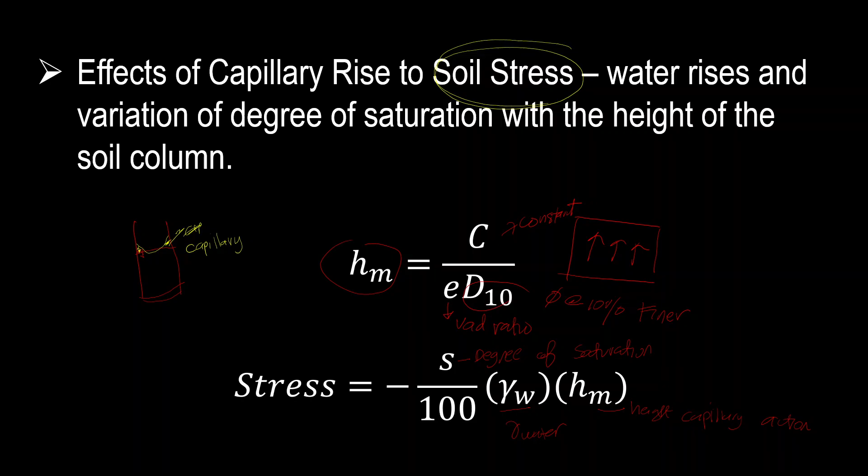This problem came from a CE board exam, November 1998. A clay layer 4 meters thick rests beneath a soil deposit of submerged sand 8 meters thick. The top of the sand is located 3 meters below the surface of the lake. The saturated unit weight of the sand is 25 kilonewtons per cubic meter, and the clay is 20 kilonewtons per cubic meter. Determine the total vertical pressure, pore water pressure, and effective stress at the mid-height of the clay.

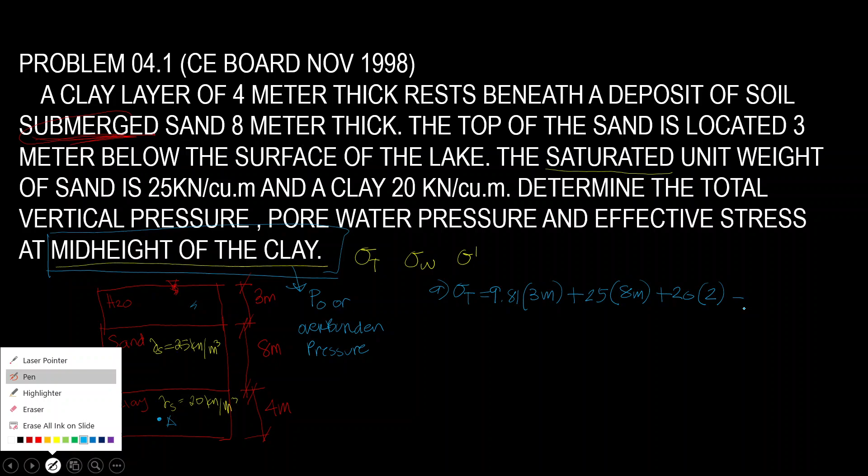Kapag kinompute natin yan, makakakuha tayo ng sagot na 269.43 kilopascal. Ito yung sagot natin for question letter A.

Question letter B, what will be the pore water pressure? Ano daw yung pressure na na-induce ng tubig? So to solve that, pore water pressure or neutral stress is 9.81 for the unit weight of water, times mid-height of the clay hanggang dito. Tama, ito yung may tubig - so 3 plus 8 is 11, plus 2, this will also be 13 meters. So 9.81 times 13, makakakuha tayo ng 127.53 kilopascal - ito daw yung stress na na-induce ng water pressure.

Last, what will be the effective stress? Effective stress is the difference between the total minus pore water pressure. So 269.43 minus 127.53, makakakuha tayo ng sagot na 141.90 kilopascal. So ganun lang mag-solve ng vertical stresses sa soil sample.

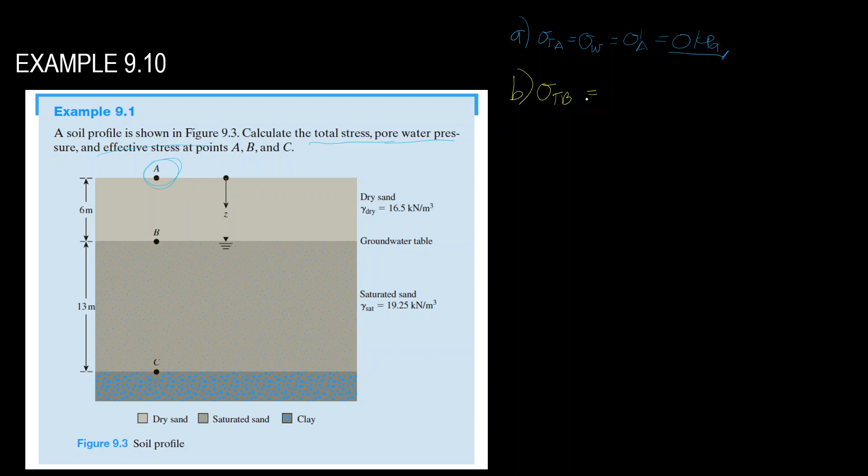What will be the total stress at B? So, kapag sinabi natin total, wala pa tayong minus. So we have 16.5 times 6 meters. Makakompute natin yan, 16.5 multiplied by 6, makakakuha tayo ng 99 kilonewton per meter squared or 99 kilopascal.

Pore water pressure or the neutral stress, since wala pa tayong tubig dito, that is 0 kilopascal. And the effective stress is the difference between total and water pressure, we have 99 minus 0, we have 99 kilopascal. That is for point B, nandito pa.

Kasi dito pa lang yung groundwater table. So since wala siyang binigay na properties at saka wala siyang in-indicate na capillary action, there's no need to compute the capillary ng sample natin. So okay pa tayo dito.

Last, letter C. What will be the total stress at point C dito?

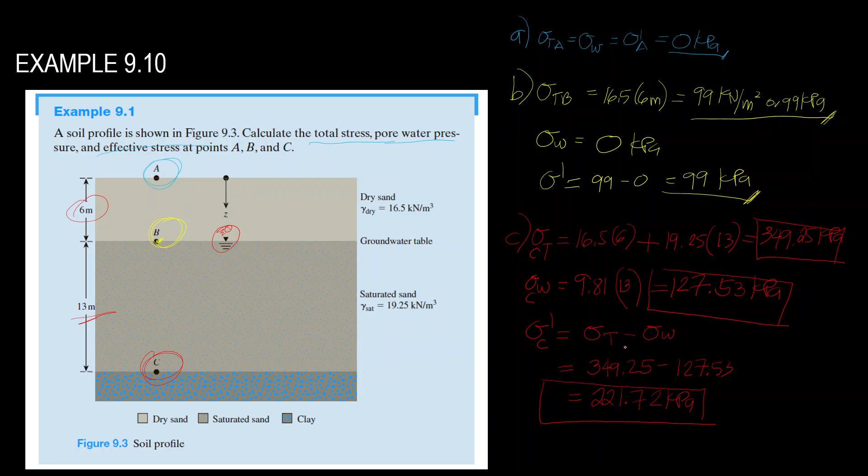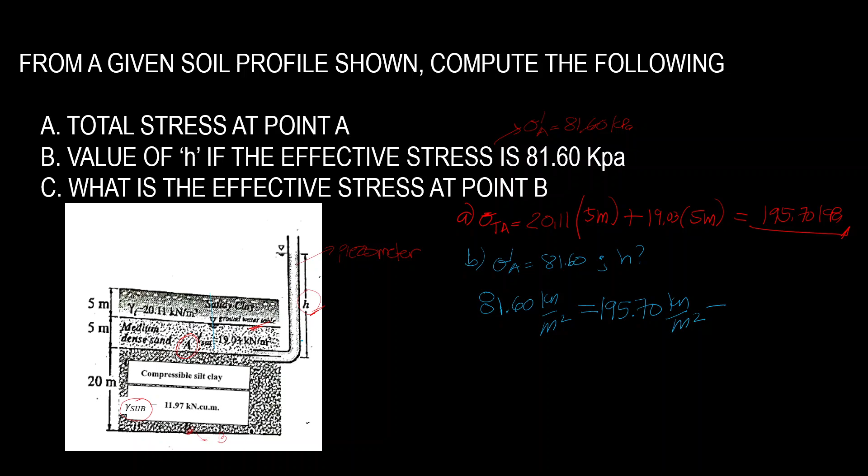Minus, bawasan natin yan kasi nagbaba tayo, since umakyat ulit tayo, therefore negative yung gagamitin natin. Sa 9.81, bakit 9.81? Dahil ito ay tubig o H2O. 9.81 multiplied by height. So one equation, one unknown, makakompute na natin yung value ni H. Kapag kinompute natin yan, makakakuha tayo ng height ng piezometer na 11.63 meters.

That is the height ng ating piezometer, 11.63 meters. Last, letter C.

What is the effective stress at point B?

So, this is point B, located 30 meters below the surface. We have the total effective stress indicated, 81.60, and we'll add to it the difference between the unit weight of water and the unit weight of saturated soil.

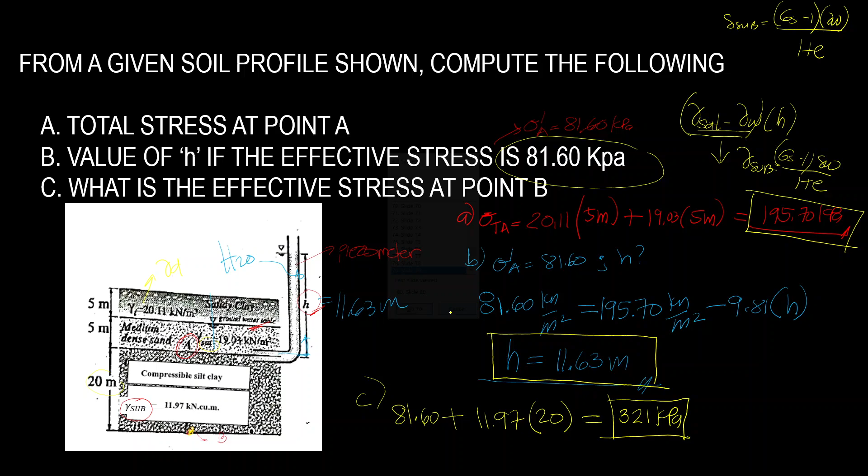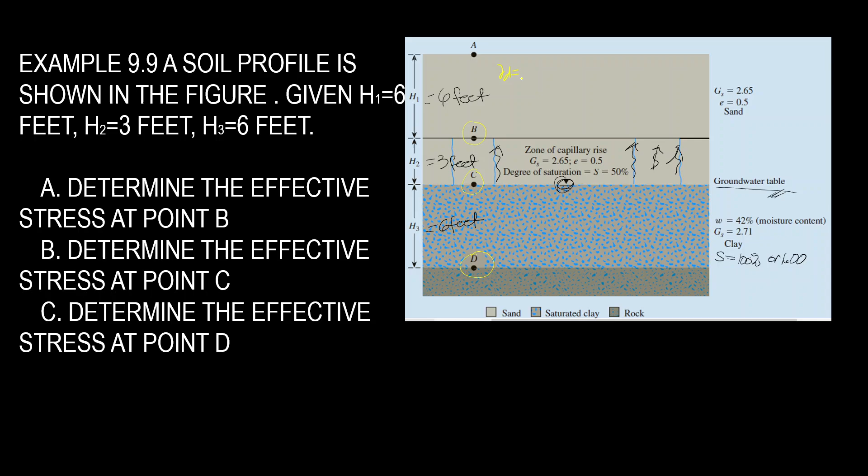Now, for our sand layer, only the specific gravity is given, so we need to compute its unit weight. To do that: dry unit weight equals GS times unit weight of water, over 1 plus E.

So: 2.65 multiplied by, since we're working in English units, 62.4 pounds per cubic foot, over 1 plus 0.5 void ratio. When we compute the dry unit weight, we get 110.24 pounds per cubic foot. That is the dry unit weight.

Okay, next, the capillary zone. As we said earlier, any type of soil aside from submerged is treated as dry. However, when we have capillary action or a capillary zone, it's as if the water has evaporated upward, so we treat the capillary zone as a moist section, or moist unit weight.

So we have the moist unit weight formula: GS times unit weight of water, times 1 plus W, over 1 plus E.

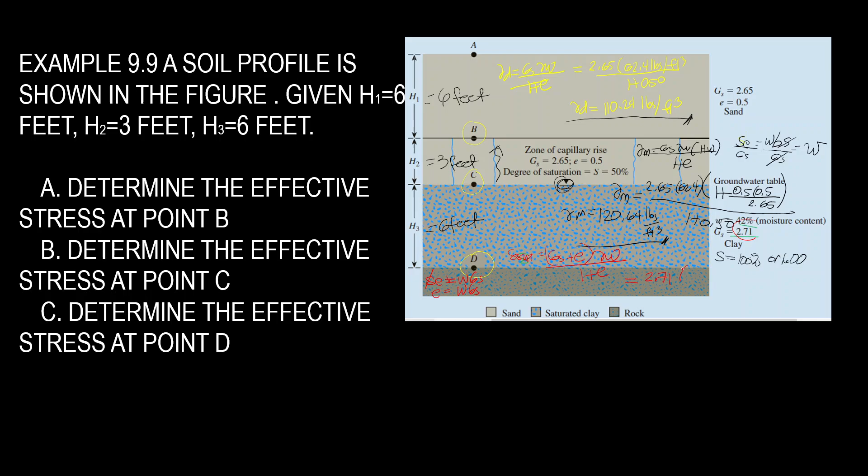So, GS natin na 2.71 plus i-sub natin 0.42 times GS na 2.71, overall 62.4 over 1 plus 0.42 times 2.71.

So makakakuha tayo ng saturated unit weight na 112.303 pounds per cubic foot.

So to summarize, unit weight of dried sand is 110.24 pounds per cubic foot. Moist naman, dito sa may capillary zone, meron tayong 120.64 pounds per cubic feet. And saturated, 112.303 pounds per cubic foot. So yun yung mga na-compute natin na mga unit weights.

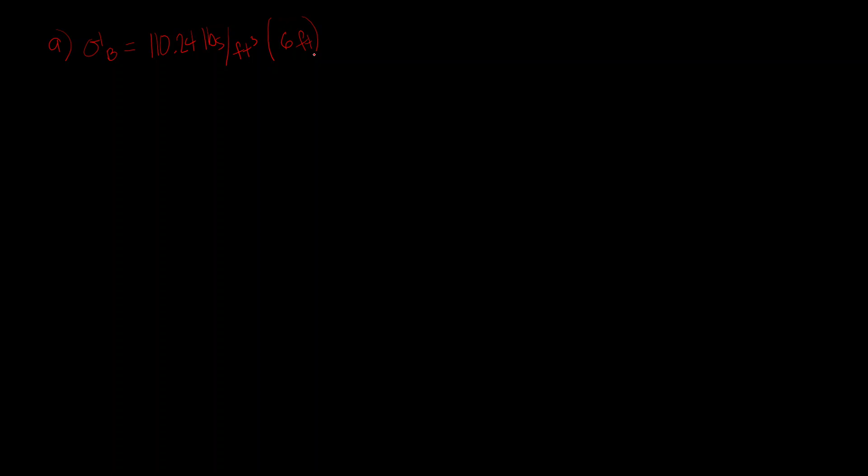So, 6 feet, unit weight of sand natin is 110.24 pounds per cubic feet, multiply by yung kanyang depth na 6 feet, minus yung effect ng capillary rise. So dahil capillary rise upward dyan, negative and negative naman palagi.

Degree of saturation is 50%, so kailangan in terms of decimal. So we have 50 divided by 100, tapos 62.4 pounds per cubic foot multiply by yung kanyang depth na 3 feet. Kapag ko-compute natin yan,

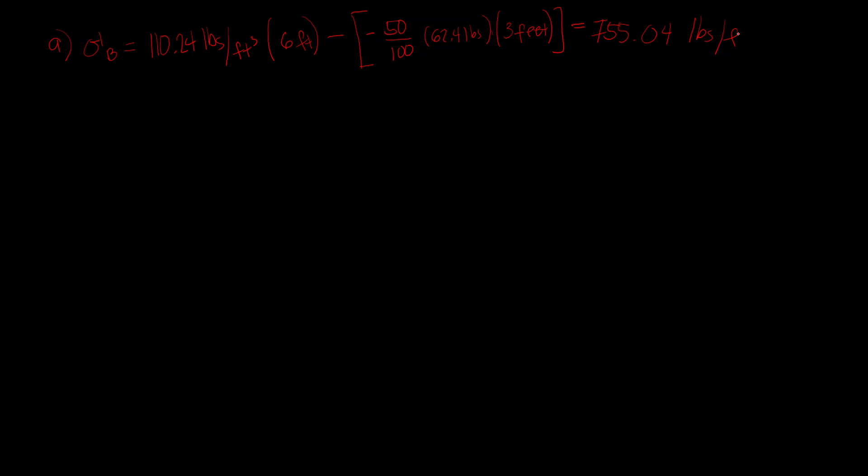110.24 times 6 minus negative 0.5 times 62.4 times 3, equals 755.04 pounds per cubic foot. So makikita natin na by the capillary action, mas nadadagdagan pa yung stress o pressure na nakukuha o na-experience ng ating soil dahil binaliktad na natin yan, negative times negative, magre-result yan into a positive value. So by this equation, yung total effective stress sa point B is 755.04 pounds per cubic foot.

Second, determine the effective stress at point C dito. Dito, dried pa tayo. Due to the capillary action, moist yung ating soil sample. So parang since nalagpasan na yung ating capillary zone, there's no need to consider pa yung kanyang capillary action or capillary rise. Okay?

Next, effective stress at point C is 110.24 multiplied by 6, plus dito, yung moist tayo dito dahil meron siyang capillary action and nandito pa lang yung ating groundwater table. So 120.64 multiplied by yung kanyang depth na 3 feet.

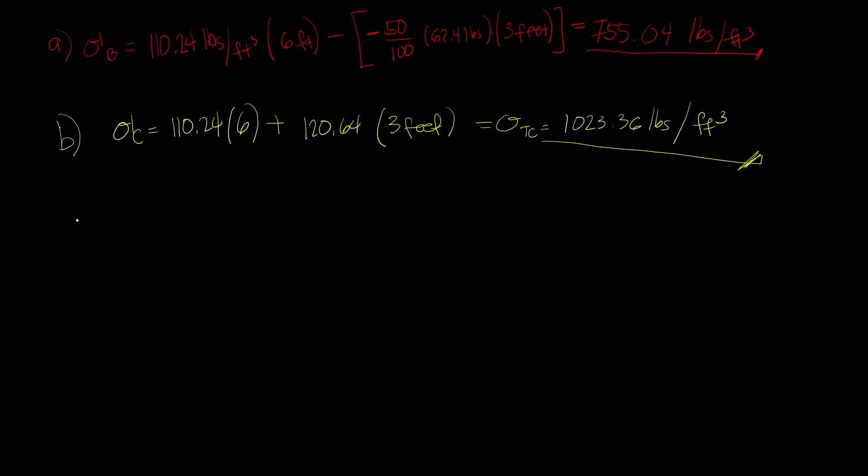Last question, letter C. Determine the effective stress at point D dito sa pinakailalim. To solve that, since effective stress na yung letter C natin dito, dadagdagan na lang natin siya ng value na ito, effective stress. So effective stress at point D is effective stress at C. Kung gusto natin ulitin ito, okay lang, pero since na-compute naman natin yan, consider na lang natin yung nakuha natin na value.

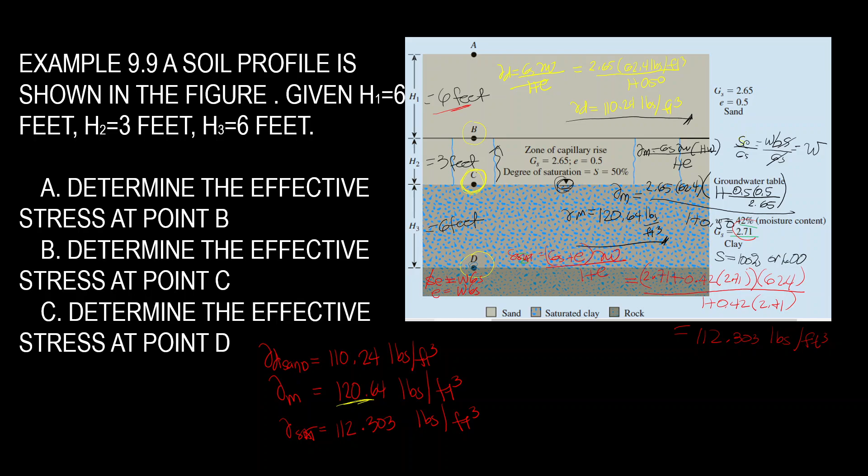Plus, saturated tayo 112.303, meron yung depth na 6 feet din. Next, since effective stress yung pinapakompute and located na yan below the groundwater table, i-compute na natin o bawasan na natin yung value ng tubig o water pressure. So to do that, just subtract 9.81 multiplied by 6 feet kasi 6 feet yung thickness.

Whereas yung effective stress natin is 1,023.36 pounds per cubic foot. So the effective stress at point D is equals to, kapag kinumpit natin yan, makakakuha tayo ng 1,638.32 pounds per cubic foot.

So double check: 1,023.36 plus 112.303 times 6 minus 9.81 times 6. Sorry, meron tayong mali dito. Since English pala yung ginamit dito, so this is 62.4. So mali yung sagot natin.

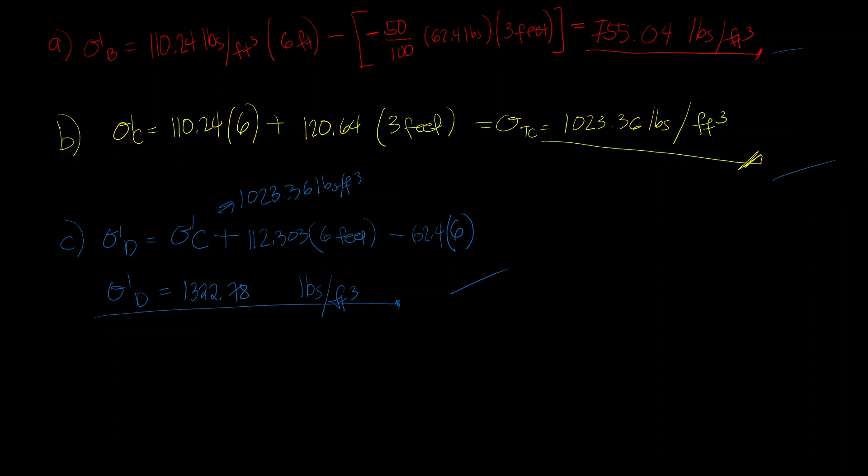So ganun ni-compute yung mga effective stresses natin. Ganun lang ang pag-compute sa vertical stresses. So to sum up: vertical stresses, na-compute natin kung paano ba i-compute yung total vertical stress natin, yung kabuuan. Yung pore water pressure naman, kung ano yung pressure na induce ng presence of water table. And the effective stress is the difference ng ating total vertical stress and pore water pressure or the neutral stress.